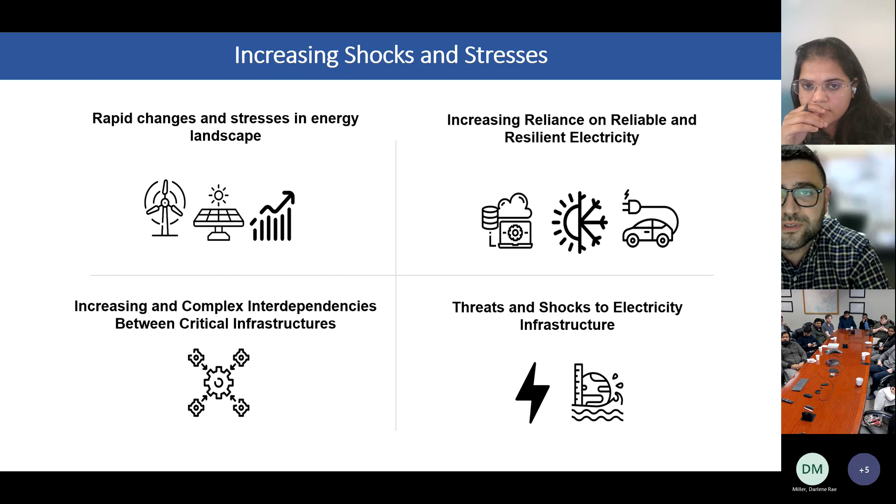However, we see a big increase in the work on the topic of power system, power network resilience, or resiliency, as you call it in the States, in the last decade or so. And the reasons for this are many, as there have been rapid changes and stresses in the energy landscape with the introduction of intermittent renewable sources, the increasing reliance on reliable and resilient electricity for the electrification of heating, transportation, and so on, which leads also to increasing and complex interdependence between critical infrastructures. And let's not forget the threats and the shocks to electricity infrastructure, such as windstorms, floods, earthquakes, wildfires, and so on, which really put resilience in the spotlight of power system planners, operators, and decision-making bodies. But when it comes to high impact, low probability events, what is really a HILP event?

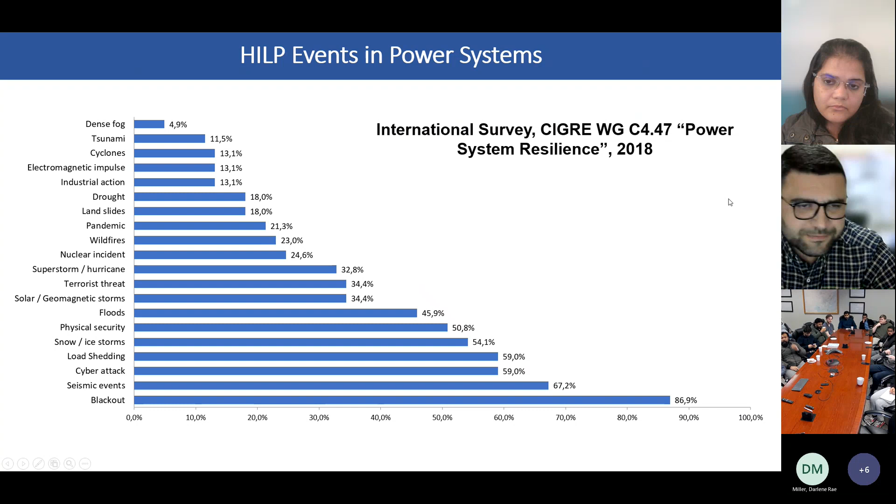But we ran a survey within the CIGRE working group that I was chairing since 2017. We ran a survey among 100 responders around the globe on what HILP events they're facing in their own system. And these are the responses that we got, which include all the known events, let's say, such as wildfires, floods, cyber attacks, seismic events, and so on. But very interestingly, about 1/5 of the responders also responded with pandemic.

And this survey was done in 2018, way before COVID. None of the working group members paid attention to that cause, to the pandemic, which, as we evidenced later on with COVID, had a huge impact. So we don't know if this was from experience in their own network, an epiphany, or a back to the future moment from the guys that actually responded with the pandemic as a HILP event for power systems.

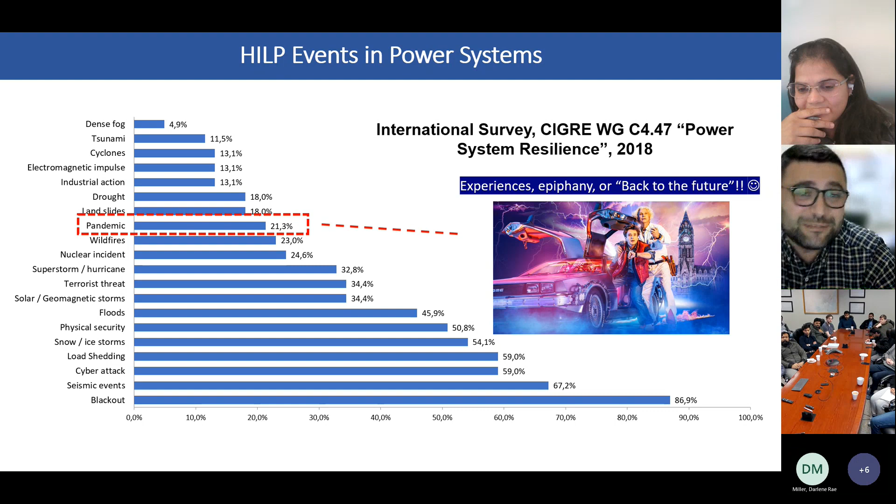So there have been very recent blackouts around the globe to which bad weather contributed to some extent, for example, the South Australian blackout in 2016, the UK blackout in 2019, and the very well-known Texas blackout in 2021. And let's also not forget about the near misses. Sometimes, because they have not led to any tangible impacts or consequences, they're ignored.

But in this particular event, for example, in July 2021, there was a fire on the border with Spain, in the south of France, which threatened the power system. There was a big frequency oscillation with some load disconnection. And if it wasn't for the fast frequency response from the Spanish system, we could have been talking about a new system separation of the continental European network.

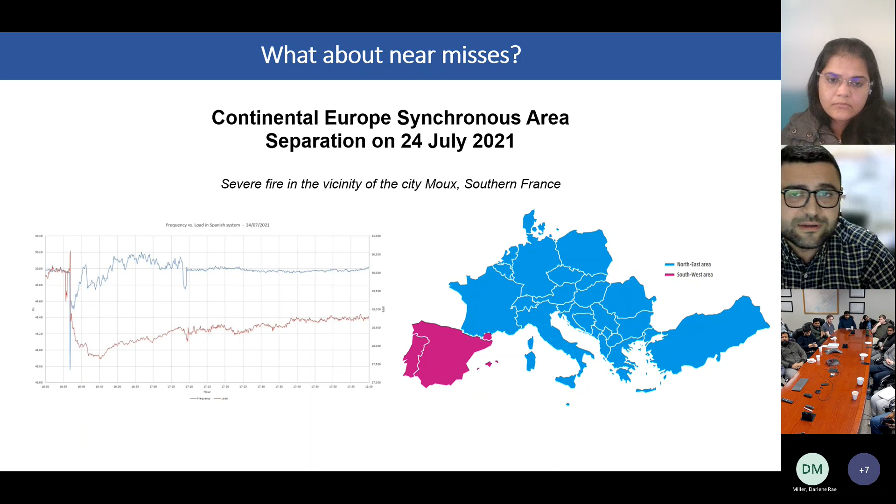So using the average energy not supplied risks neglecting and not properly designing the system and giving the incentives for resilience-driven planning to withstand this kind of extreme events. We did an analysis of UK outage data. Although the number of power cuts because of weather counts for only about 2% in the UK, the customers per power cut for weather is huge. So weather has a huge impact in the UK and worldwide, and it should be included in the regulatory standards in order to incentivize resilience-driven investments.

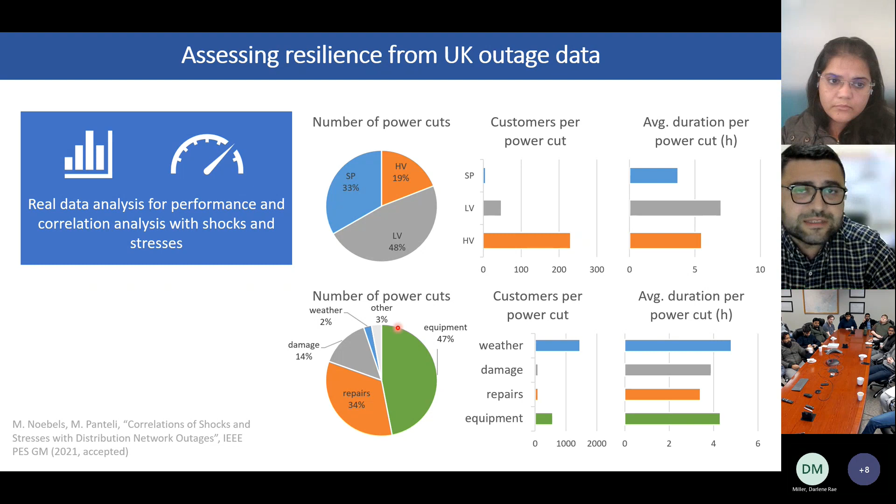So if we see this in a more mathematical formulation, let's say, if we consider this probability distribution for ENS, so in the y-axis we have the probability, in the x-axis we have the energy not supplied, and we have this probability distribution. So currently we design the system, we plan the system based on credible outages, based basically on the mean, on the average, or on the expected energy not supplied. This is how we traditionally design the system for decades. Undoubtedly, power system is perhaps the most reliable critical infrastructure that we have.

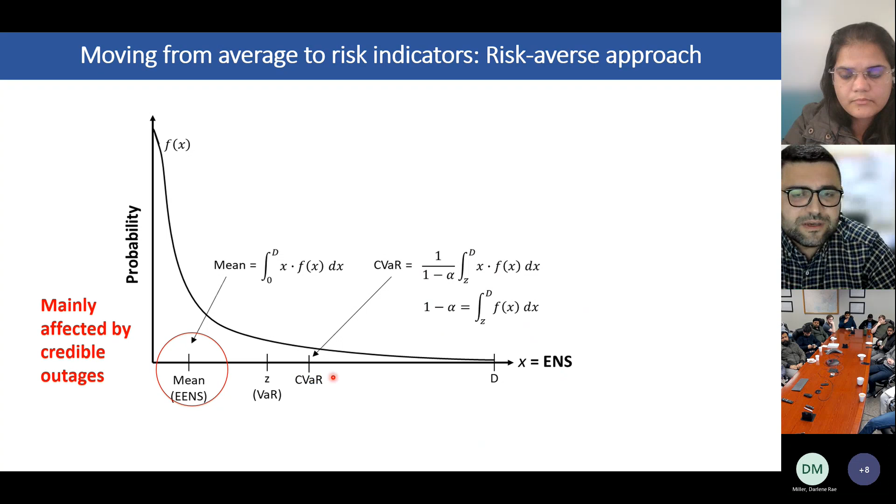But these tail risk events, such as natural hazards, extreme weather, catastrophic events, common mode failures, which actually lie in the tail of this probability distribution as high impact, so high energy not supplied, but low probability, become more and more frequent. So a lot of people say that this will become the new norm, as we evidence, for example, in Florida, that they suffer from a hurricane every year. In Europe, we have wildfires every year. In Chile, they have earthquakes, hundreds of earthquakes per year.

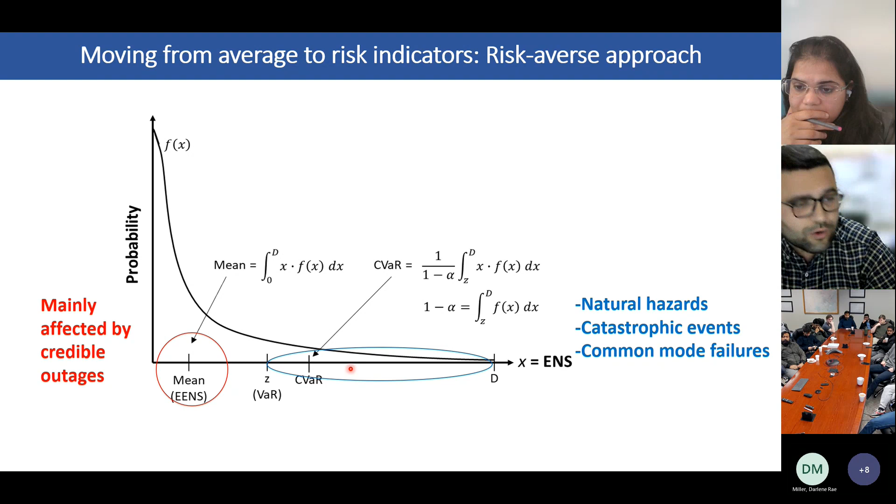So these kind of events are becoming more and more frequent and more disastrous because of climate change. Lots of people don't believe that, but let's ignore that. So because of climate change, lots of these events are becoming more and more frequent, longer, and more impactful for the network. So we need to do something about it.

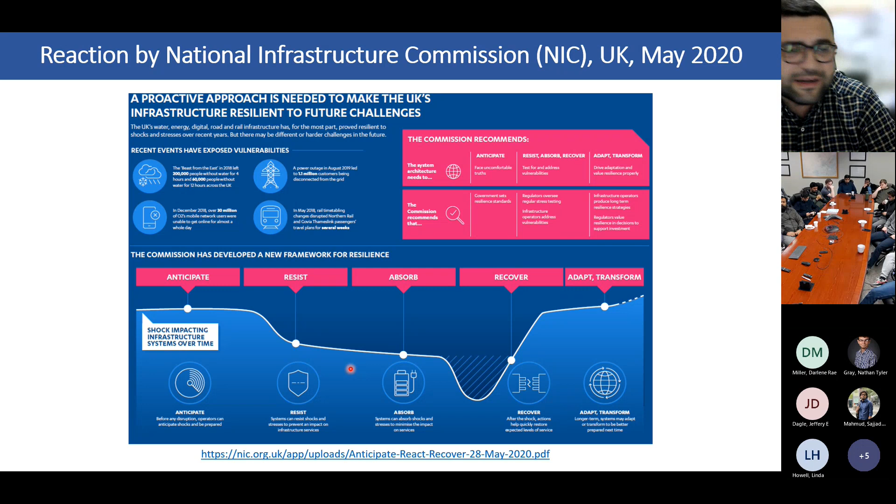There was a reaction by many organizations in the last years, including, for example, the National Infrastructure Commission in UK in 2020, which basically urged Ofgem, the UK regulator, to come up with new resilience standards, which should be overseen by the regulators during regular stress testing of the system.

And there was a reaction by the UK government to this report, which was out in September 2021. And they promised to publish what they called the resilience strategy. That was not published yet. It was supposed to be published like a year ago. We're still waiting. But this resilience strategy will set the guidelines for network operators and network owners to explicitly consider resilience as a planning criterion.

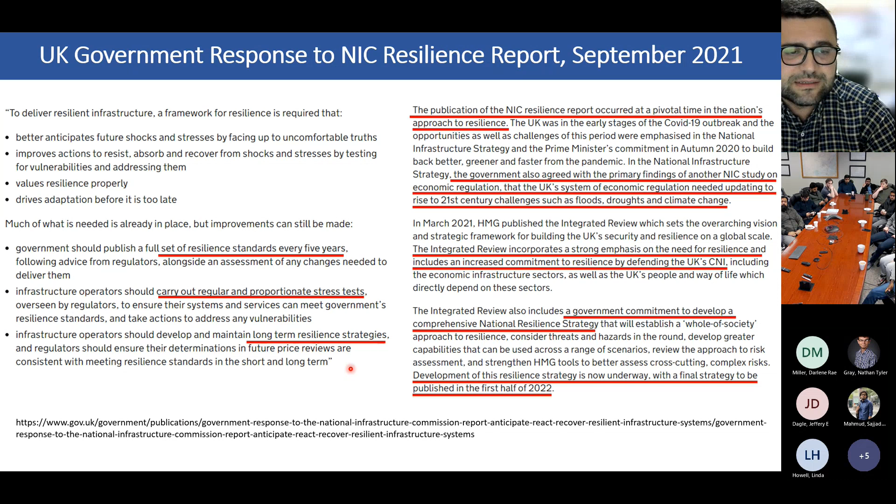So what is really resilience? Within the CIGRE working group that we've been working on for the last years, we simply defined resilience as the ability to limit the extent, severity, and duration of system degradation following an extreme event. And there are many key features that need to be taken into consideration when we talk about resilience, such as the anticipation, preparation, and so on, which are very well known from other definitions as well. But within our definition, we also put another feature, which is the sustainment of critical system operation.

So within the CIGRE working group, we acknowledged that when you are exposed to a HILP event, a high impact low probability event, it's almost impossible not to lose some functionality of the system. So what this feature says is to maintain a minimum system load level in order to maintain a reduced but acceptable functioning of everyday life. So you secure the functioning of people's modern everyday life, and then you try to recover as quickly as possible following that maintenance of a minimum level of security and electricity supply in your system.

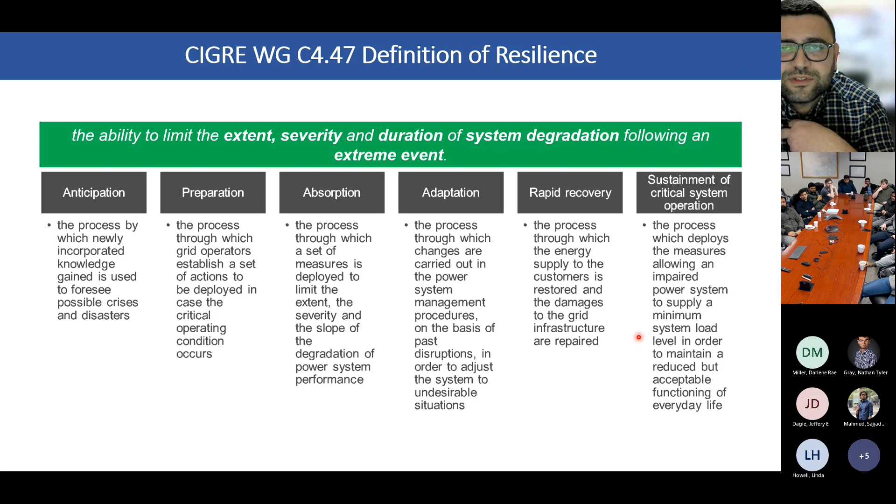And we published some papers and some blog articles on this definition if you would like to find out more information. So following this introduction, which I hope was not too tiring, to go into more technical discussion now on different tools that we developed. The first tool that I would like to mention is what we call Resilient, a realistic event simulator for international location independent energy network testing.

So as you can see in this GIF, this is Hurricane Matthew, which happened in 2016 over Florida. The model we developed is a fully flexible and modular simulator. And when I say modular, it's built in a way that the end user can use specific modules, specific functions of the simulator that are of interest to them. It's very flexible as it enables the user to define several critical features, such as the number of hazards per year, the temporal and spatial modeling, how long it will last, where it will move, the intensity of the hazard, and so on.

And it can also simulate random events in a stochastic manner, as well as simulate historical events as the one we see in this GIF, which is the Hurricane Matthew back in 2016 in Florida. So we see in this GIF that as the event moves across the network, what the simulator does is identify the assets that are affected by the event and the intensity with which the assets are affected.

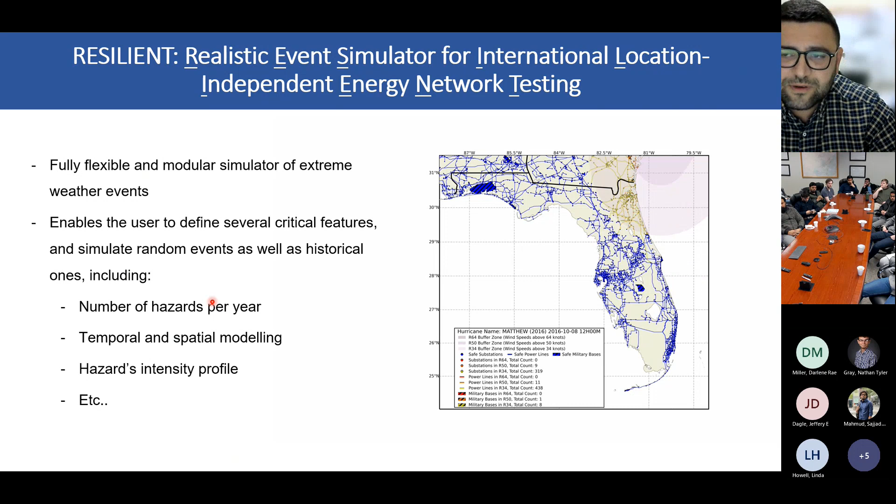Then it can basically derive the time and the hazard-dependent failure probability and status of the assets, and then calculate the energy not supplied due to the event in a spatial temporal manner. It can output a lot of results, as we'll see in the coming slides.

So a version of that model has been applied also in the Project Forward resilience measures that we ran with National Grid and the consultancy company Arup in the UK, which was shortlisted for the Consultancy and Engineering Awards in 2022. Unfortunately, we were just runners-up. We didn't win the award, but even being shortlisted was a huge achievement among tens of applications. So within this project, we developed a resilience tiered approach.

So in tier 1, what Arup led in the project, was a more, let's say, qualitative study for understanding the maturity level of National Grid as a business, as an organization. So it was more into the internal mechanism of National Grid towards responding to an extreme event.

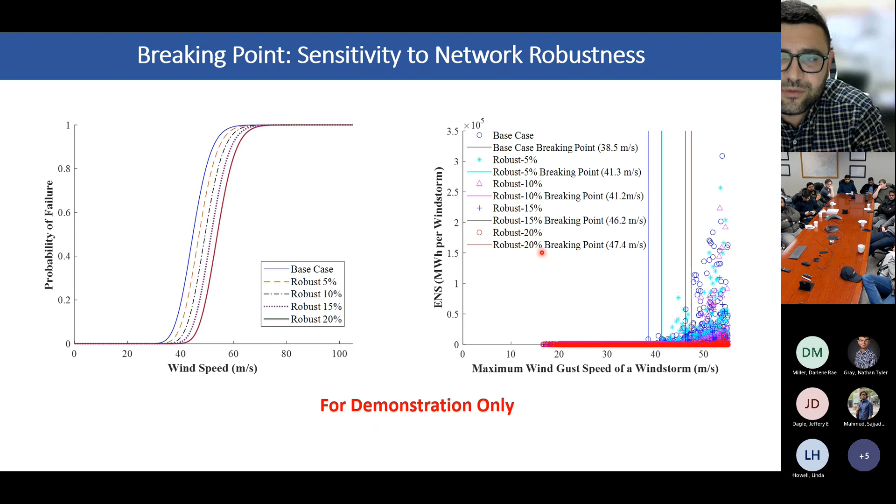And we evaluated the impact of this network robustness as well on the conditional value at risk and the expected energy not supplied, just to give an idea to National Grid, when you choose different investments, how your average energy not supplied and the more risk-based values of your energy supply change when you invest in more and more infrastructure.

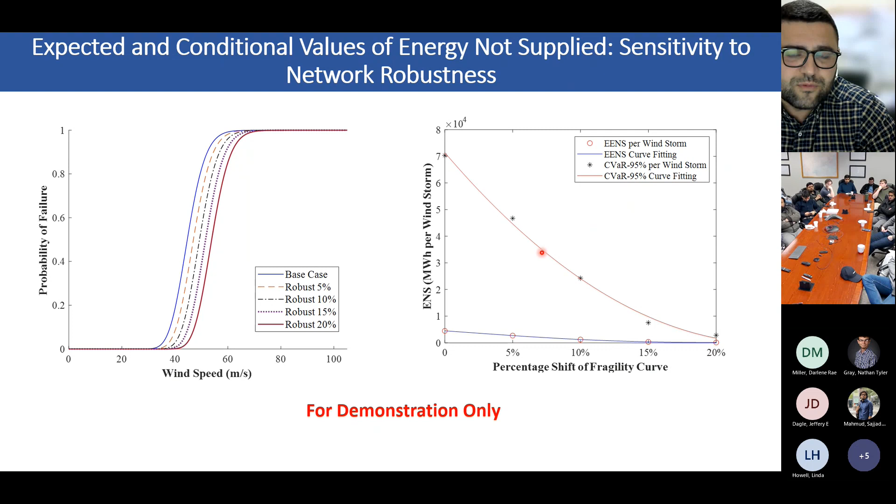And we also evaluate the resilience of future energy scenarios. So National Grid, in their future energy scenarios documents, have a lot of potential futures that National Grid might see, with the penetration of heat pumps, electric vehicles, and so on. So they were interested in applying our models to see how those future energy scenarios behave when they're exposed to a severe, let's say, windstorm. And we provided these findings to National Grid to show them how the different scenarios will behave in terms of resilience in the future.

So far, the work with National Grid was more, let's say, a static analysis. So we were modeling the windstorm, we were seeing which assets will fail, but we were not modeling the cascading across the system. This is something that we are doing now with National Grid. It provides much more significant and meaningful outputs.

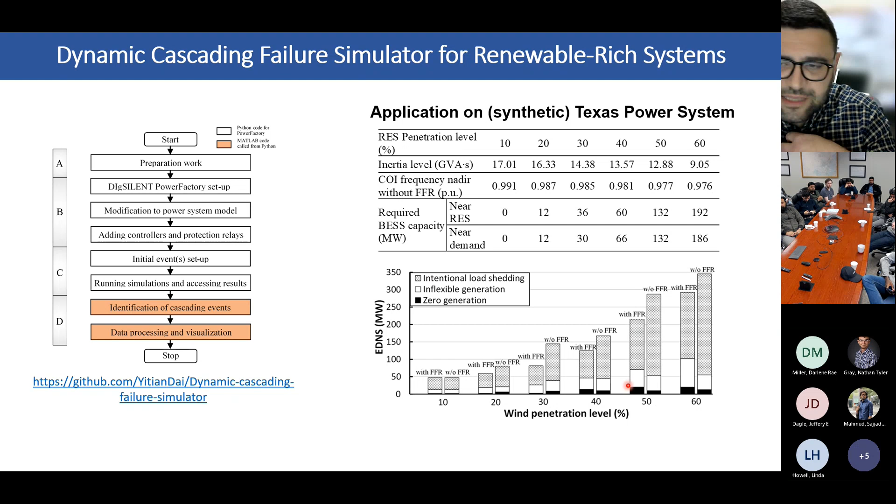And we applied it, for example, on the synthetic Texas power system, where we tried to see if fast frequency response can mitigate the impacts of cascadings with increasing wind penetration level. And this is very important because as the renewables get more and more into the network, as we know, the system inertia is reduced more and more. So having fast frequency response services is very important. And this model can quantify the impacts of cascading, first on the dynamic stability of the system, and then the contribution of different services such as FFR in mitigating the impacts of potential cascadings for high penetration of renewable energy sources.

And this code is also available on GitHub with all the documentation if you want to have a look. And we also have a paper which walks you through step by step on the Python script to help you test and try our model. So if you have any questions on these two models, if you are interested, if you want to download them, please feel free to get in touch.

So I will skip this just for the sake of time. So the next tool that I want to talk about is what we call CIPROS, which basically stands for Capital Investment Planning for Resilience Optimization of Smart Grids.

So basically, it's a modular tool which has different interesting features. So we have the weather event simulator that we described in the previous part of the presentation. We also added a feature on GIS-based modeling of the energy, the transportation, and the communication system in one platform. So basically, we can optimally coordinate the dispatch of mobile energy resources. And it's very important to consider beyond just the electricity, also the transportation, as well as the communication system in order for optimally coordinating these mobile resources.

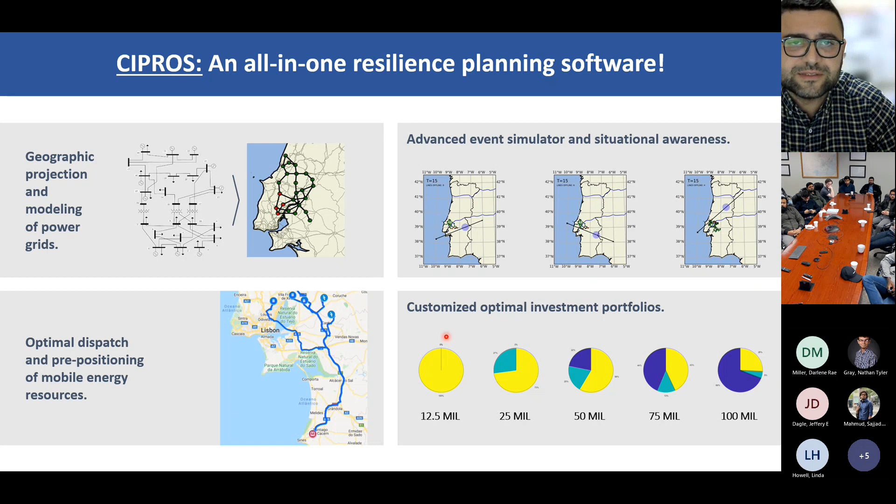So an example of this planning tool: this work with Chile was a previous version, if you like, of CIPROS. So in this work with the Chilean colleagues, we developed an optimization via simulation model. So basically there are two stages in this work. In the first stage, we propose different enhancement options to the system operator through optimizing a resilience metric, whatever that is. It's up to the preference of the system operator.

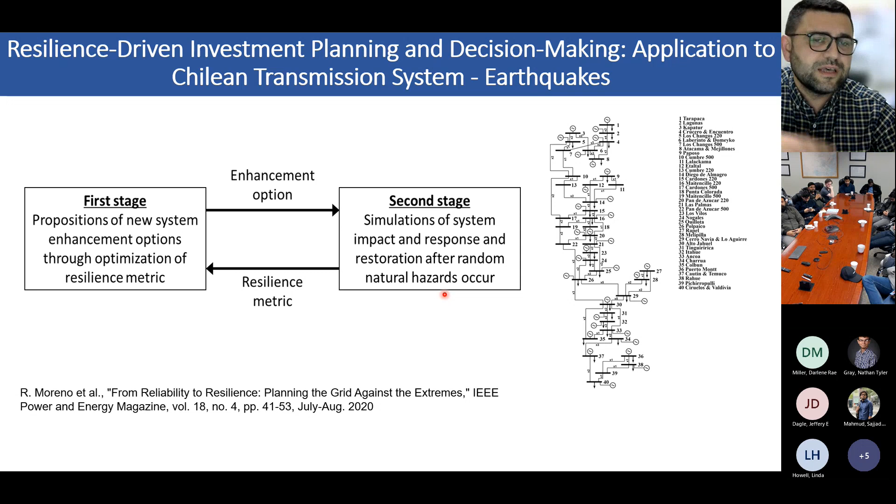Then we basically throw that enhancement option to the second stage, which is the simulator we talked about earlier, which simulates the impact on the system, the response, the restoration, and so on after random natural hazards occur. So we have the base network, then we select an enhancement option, and then we quantify the impact of that on the network. And that's an iterative process, subject, of course, to budget constraints, until the optimal portfolios of investments are identified.

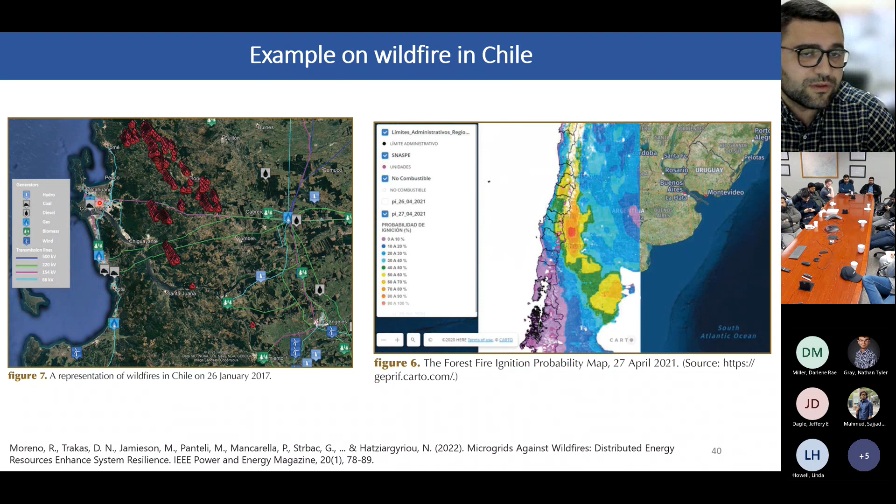So we developed this simple case study where we have the main grid and two neighboring areas, as in the case of Chile, with two lines connecting each system with the main grid, two lines connecting these areas between them, and then we consider different DERs randomly in the two areas to evaluate the role of flexibility. Then we consider a fire, driven by a real event in Chile, that was disconnecting these two transmission corridors connecting area B with the main grid.

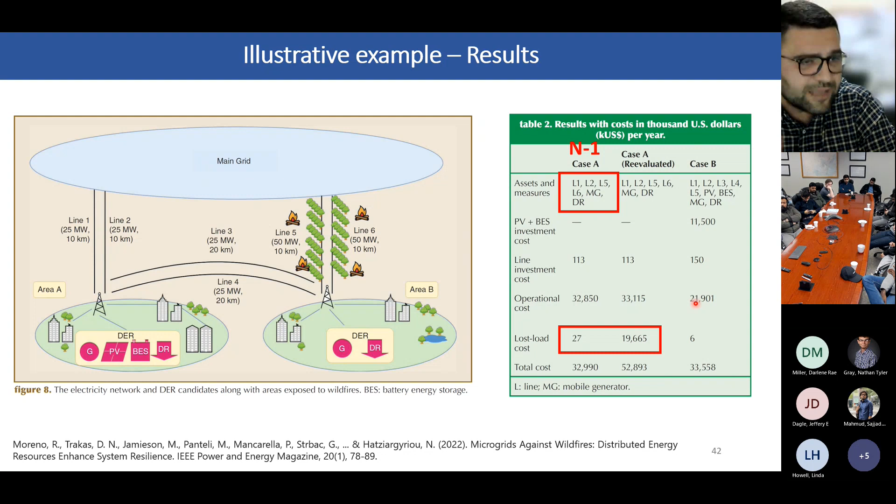Table 2 here on the right shows three cases. Case A is when we do not consider the impact of wildfires. Case A reevaluated is with the same assets and measures, but considering the impact of wildfires. We see that the lost load cost increases significantly from 27 to 19,665 thousands of US dollars. And case B is considering the wildfires, but applying a resilience-driven planning and operation of the system, as we've seen in the previous slides.

When we do that, we harden the infrastructure, but we put more PV, more batteries, and so on across the system, which increases the investment in new PVs and batteries for Chile. But at the same time, we managed to reduce a lot the lost load cost, and also the operational cost. So we balance the investment costs with the savings that you get when you get an extreme event. And the total cost is approximately the same as the case not considering the impact of wildfires with a simple N-1 case study.

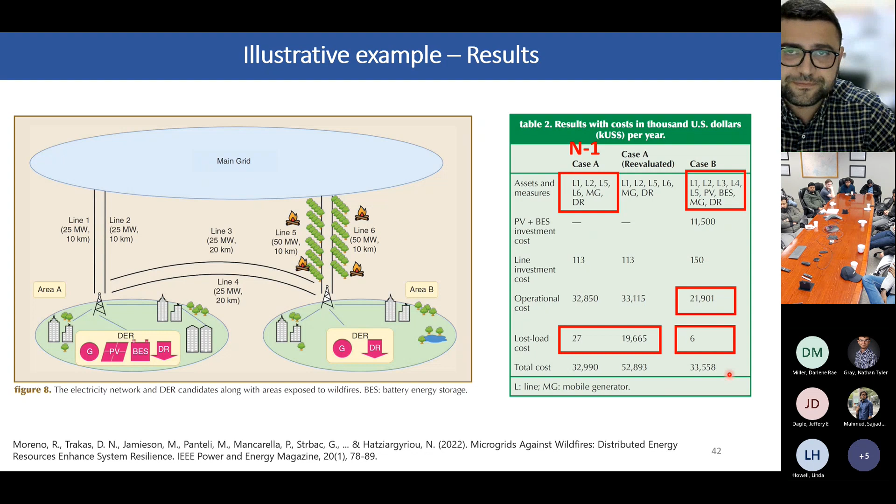The next tool that we developed very recently is called MERS-DIP, which is a mobile energy resource scheduling and dispatch incorporated in optimal power flow models. As we see in this figure, this is a multi-layer platform. It has the electricity system and a transportation system using Google Maps, via a Python API. What we're trying to do here is take into account the driving distance of the mobile energy resources to reach a point in the network.

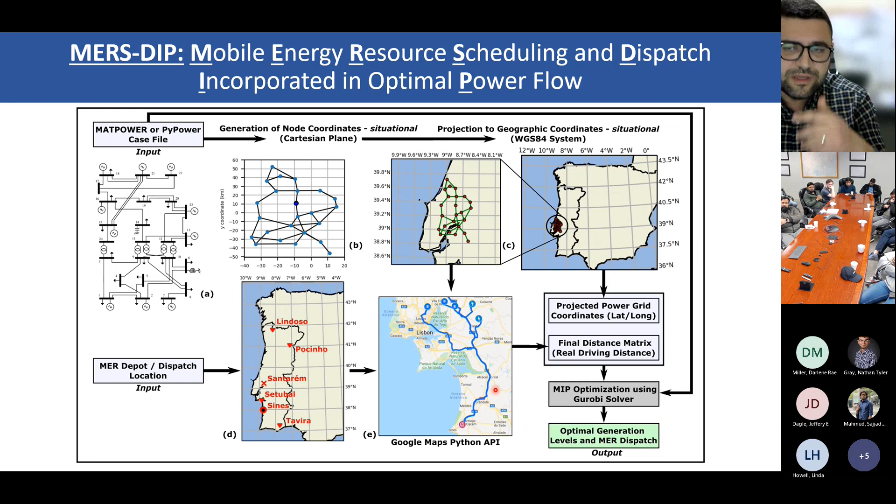In many existing works in the literature, they just assume the electricity network and depot of the mobile resources, and then assume that they are dispatched randomly to different nodes. What we actually do in this work is consider the driving distance between the depot of the mobile energy resources and the affected network, and if the transportation system is affected, which neighboring depot can dispatch the mobile energy resources to the affected part of the network, in order to take into account in one single platform the status of the electricity network as well as the transportation.

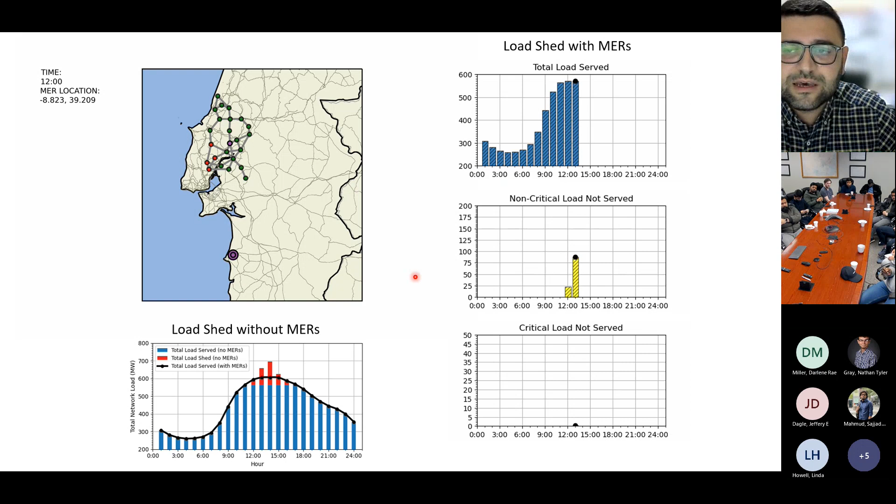So this is a very nice simulator to co-simulate and co-optimize, if you like, the usage of the electricity and the transportation network. We did this based on reliability as well as resilience-centric analysis to see the impact of having one MER or multiple mobile energy resources dispatching across the network.

Because when an event approaches, we don't know where exactly it's going to hit, by how much the network will be affected, and so on. So what we did, we trained a machine learning algorithm with hundreds of thousands of cascading events on different locations of the event. So when the actual event happens, we just use some simple characteristics of the event to throw into these machine learning algorithms to give, in close to real time, the optimal solution for operational planning, for splitting here the network into different numbers of islands.

So another case study that we did in the project with Malaysia. We were tasked by Sarawak Energy, which is the electricity distribution operator in Borneo Island in Malaysia. There are a lot of villages which are rural, very remotely located in Borneo Island. So Sarawak Energy was interested to see if it's better to expand the existing grid to reach these villages or to use off-grid electrification through what they called the Sarawak Alternative Rural Electrification Scheme, which mainly is batteries with PVs installed in different villages.

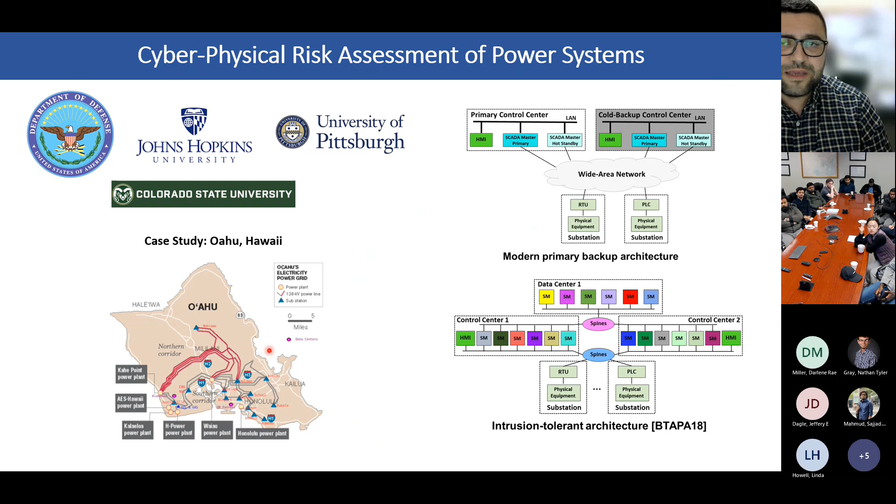We also did some work on cyber-physical risk assessment in collaboration with the Department of Defense, Johns Hopkins, University of Pittsburgh, and Colorado State University in the States. One of the case studies was the island of Oahu in Hawaii, where we tried to see the increasing risk when considering the coupling of power and communication systems, with and without the mobile energy sources that we talked about earlier in the presentation.

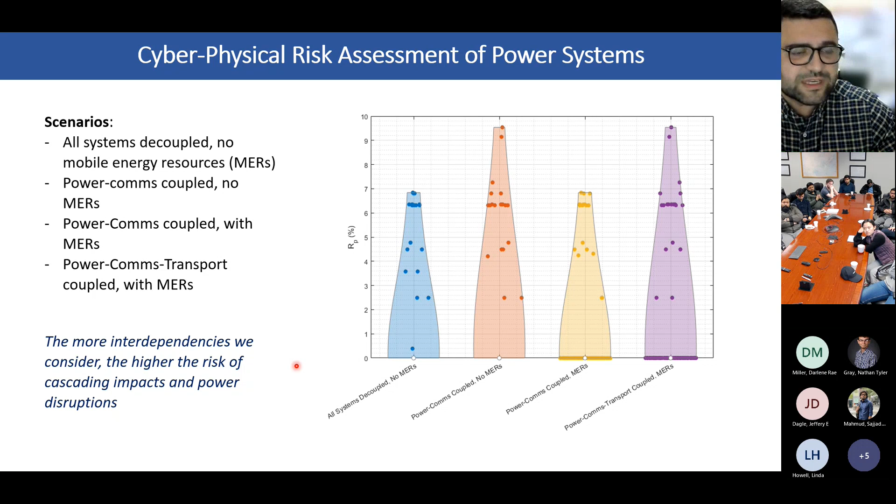And as we expected, the more interdependencies we consider, the higher the risk of cascading impacts and power disruptions for the island. But we were able to quantify the impact of hurricanes on the island with and without considering the coupling of the power and communication infrastructure. We provided very useful insights for the local authorities there to better organize and plan their system.

We also recently started doing some work on multi-energy resilience, which is becoming more and more important with the coupling of different energy vectors, for example, electricity, gas, heat, and so on. And we're trying now to understand how a failure in one system can propagate to other energy vectors, and how in a whole multi-energy system we can leverage the flexibility from different energy resources in order to better withstand extreme events.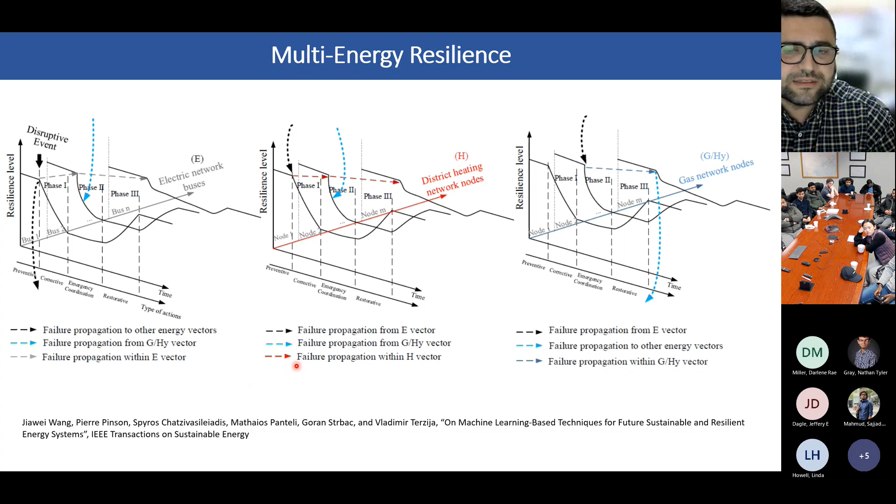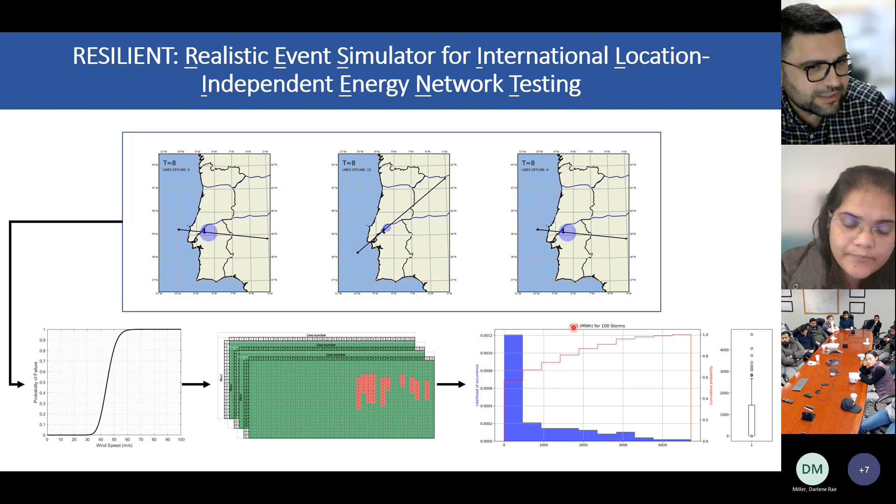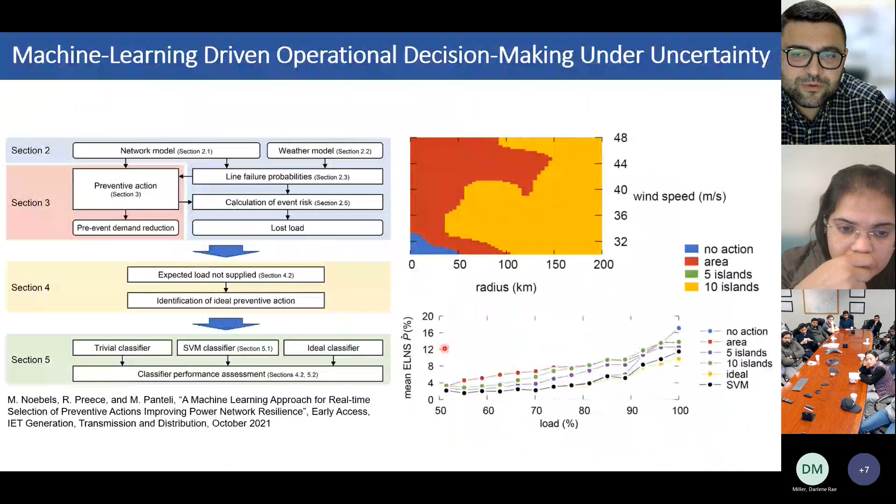But for the last studies I've shown for Malaysia, the flood models we have are very detailed, because they were developed by climate and weather modelers from Newcastle University, with whom we had the project. And I need to be honest, they are far more advanced than the models that me and my team can develop, because they took into account return periods, reanalysis data, and so on in order to train their flood models.

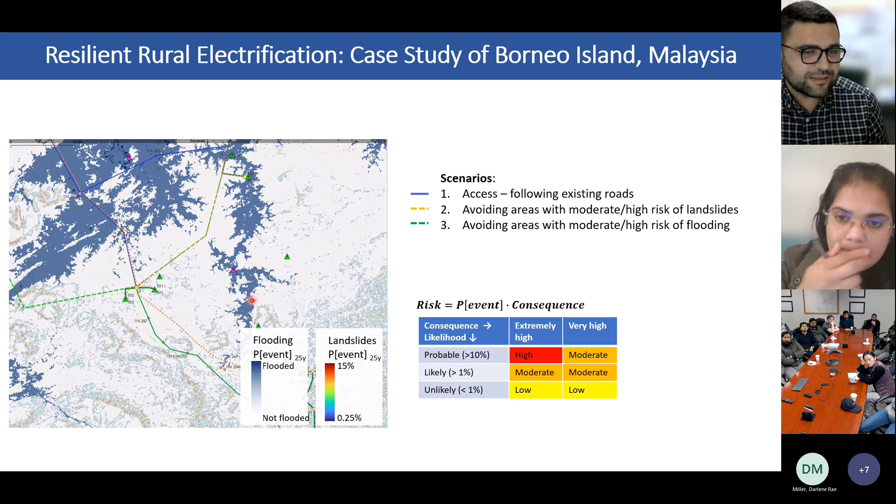So they are very detailed models, and that's an issue we need to solve from the energy community side, to communicate more with these people. Because they have the models and the data, definitely much better data and models than we have. But in my opinion, we don't communicate enough.

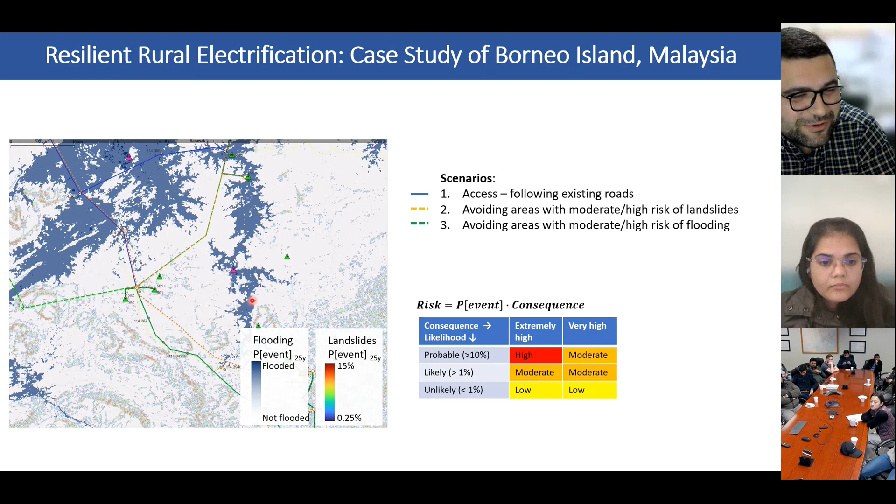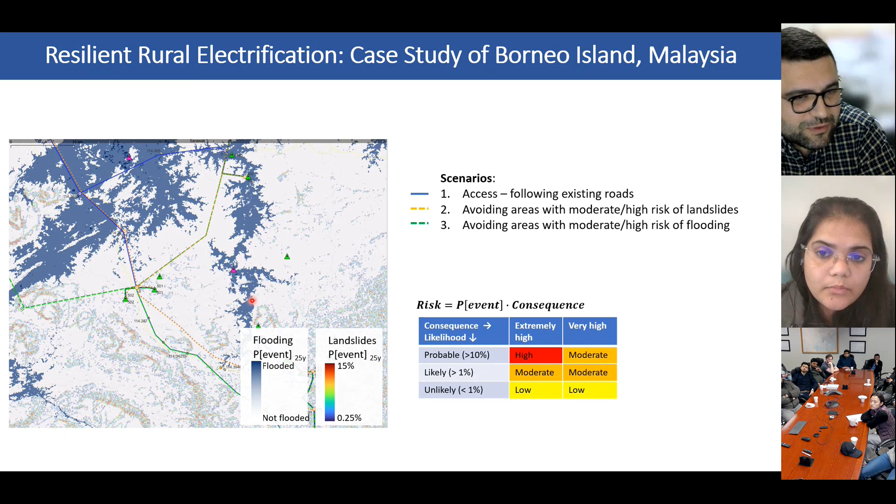Yeah, Sanjeev, that's a very, very good question. As I said earlier, I'm always honest and transparent with our work. So that's a limitation indeed of our work. I admit it in many venues. What we do, as many scholars coming from the power system community, we use the concept of fragility curves to relate the failure probability of the assets to the intensity of the hazard.

Now, some of those fragility curves were developed based on, let's say, experiences. Others were developed based on real events, if there were enough data to actually draw some statistical analysis out of those data. But there is an uncertainty around that. And that is what we identified as a big limitation in our work, and what we're currently working on, and we're hoping to be successful in another round that we did with National Grid now.

We tried to do that in the previous projects, because as you very correctly said, the National Grid engineer said, okay, you are using a fragility curve, but an asset on the coast, exposed to winds, is in a much worse situation than an asset in the mainland. So the asset health index is different, the aging is different. There are a lot of parameters to consider when characterizing the fragility and the vulnerability of an asset. That is something we hope to improve in our future work.

But that was an excellent point. If you have any recommendations, I would be happy to follow up with you to discuss it further. Yeah, sure. I'll follow up offline on those ones. We did similar work with Professor Anurag here.

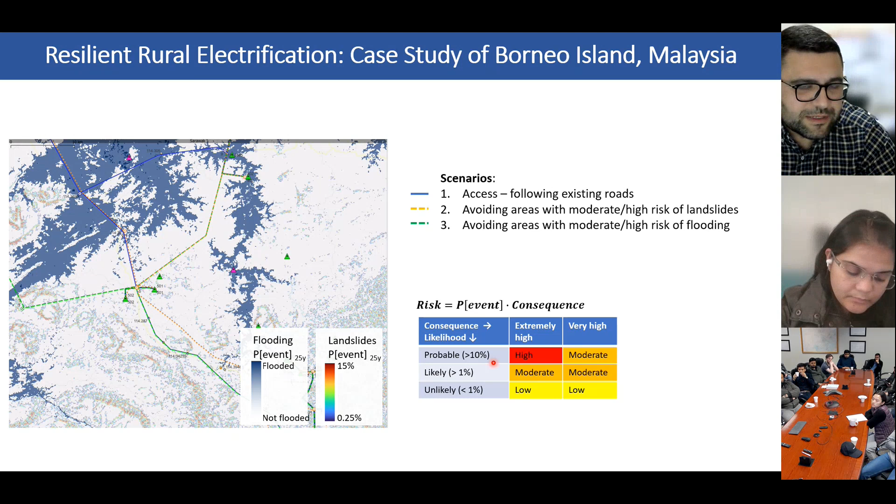So you're continuing it. The last question: the tools you developed, are they reactive enough? Reactive, I mean, would we be able to modify any parameters to load our own system, and then be able to analyze any system? Are they reactive online or offline? Yeah. So you're talking about the cascading simulators that are already available. Yes.

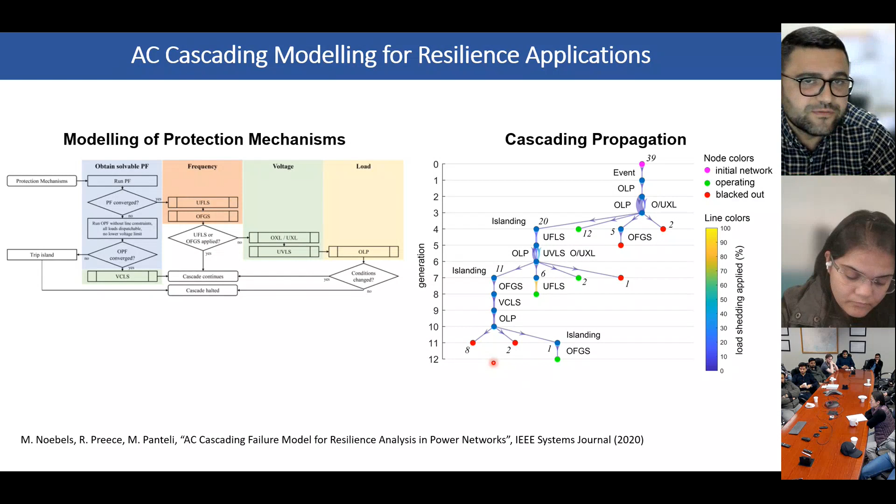So the first one has already been used by many colleagues of mine, and we got very positive feedback. It's very easy. Okay, you need some time, but the average familiarization time that we got from colleagues was 2-3 weeks. You are up and running with the model. And then you can put in any network you want. It has clear instructions how to do it, and it's using MATPOWER case studies. So if you have a network in MATPOWER format, it is very straightforward to run.

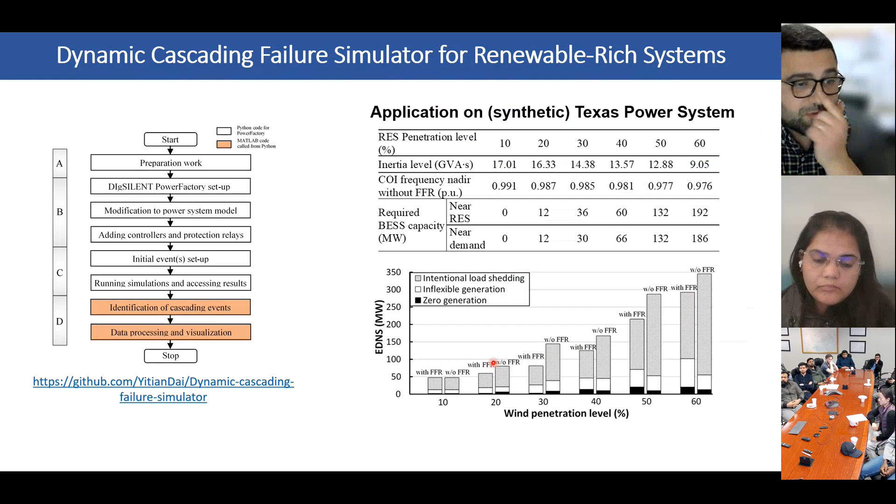When it comes to the dynamic model, a nice feature that I forgot to mention is that it can automatically develop the dynamic parameters of any network. So it can define the generator parameters, the line parameters, and so on in the dynamic data for any network. So that's another nice feature.

So you can put in any network you want. The code will develop the dynamic version of that network based on some assumptions we have in the model. And then you can run the dynamic studies. This is a bit heavier than the other model because it runs a full dynamic study. But they are quite user-friendly, yes.

Oh, thank you, appreciate it. Yeah, thank you. Thanks, Sanjeev. Back to students. Any questions? Okay, go ahead. Can you go to your maybe second or third slide in which there was a graph? No, I don't have a question. Just come here and let's talk. Okay.

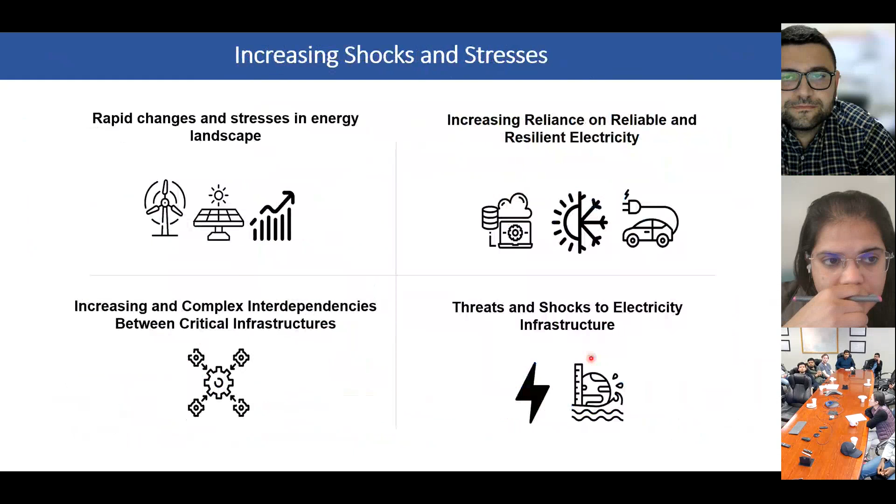So basically, the penalty is monetary. They have to pay a penalty, which is basically depending on how much they exceeded. The reward, it really depends. It might be a further financial incentive to basically build more infrastructure, or relaxation of the amount of penalty they have to pay in the next violation. So the reward varies depending on the application and the regulator. Okay.

Other questions? Yeah, I have a question. You talked about dynamic stability. What kind of stability have you considered in your study? Angular, voltage, or frequency? Voltage and frequency, yeah. Voltage and frequency. Also, I have another question. N-1 is a static study and stability is dynamic simulation. So why did you club these two different studies together?